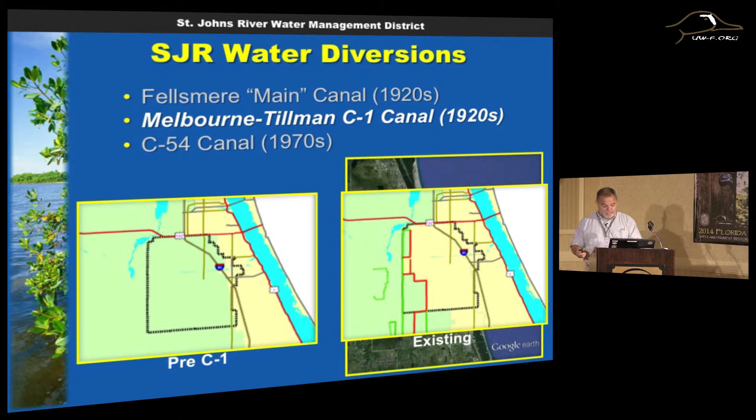If you look at, I don't know how well the green and yellow show up right here. You can see the area in green. The black box is the Melbourne-Tillman Water Control District. The area in green is part of their district that used to drain to the St. Johns River. If you look at the way it is now, all of this is turned yellow, all of this area, and this is a 100 square mile area. Almost all of that 100 square miles goes out to the Indian River Lagoon now instead of the St. Johns River. And that's what we're here to talk about, and that's what the rediversion effort's all about.

But what's wrong with that? What's the problem with putting the water? It certainly helps flood control. It gets the water out of there in those events. But what's in the water? First off, what's not in the water? There's no salt in the water, or very little salt, I should say. There's coloration, there's turbidity in the water, and maybe most importantly, there's a lot of nutrients in that water.

And what can that do? Well, you see the graph on the top, the salinity impacts. This is just one little slice of time after an event. And you can see how the salinity drops off. It plummets when these surges of fresh water move out into the lagoon.

Clarity drops. You look at the next picture, you can see the line real clearly where the clarity is. Some of that's tannin, but there's also suspended solids in there. There's a lot of things that are very bad for the water clarity, and they contain some of the material that ends up here, the muck.

We're about to spend $20 million, though the state is going to spend 10 this coming year on dredging at the Eau Gallie River. 625,000 cubic yards of muck will be dredged. I mean, it's an expensive thing to remove that muck. Those sediments that are in suspension cause those mucks, and the discoloration and the sediments that are in the water can lead to the seagrass loss.

Now, that's not what caused our seagrass loss that we had in 2011 and 12. The algal blooms did that. They shaded the light. But turbidity is another factor in that. Turbidity and algal blooms together, that's even more shading. When the light doesn't get to the seagrass, it dies.

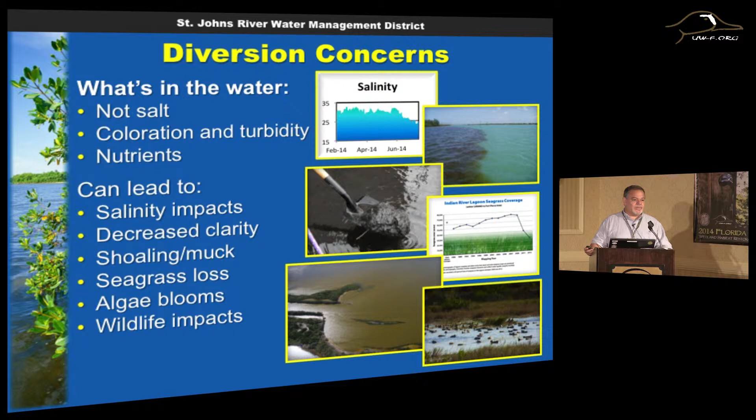You can see this is a picture of the brown tide, the algal bloom that happened for 2 years in a row. And all of this has a tremendous impact on wildlife. The ecosystem's in distress. There's no doubt about it. We're trying to figure out why, what we can do about it. And the bottom line is we want a healthy ecosystem that everyone can enjoy.

So what's the answer? The answer is really to try to put as much water as we can back where it came from, or back where it should go, I should say, back to the St. Johns River. But it's not easy. There are a lot of challenges.

There's flood control issues. There's a lot of population growth, a lot of density in the Palm Bay area. There's downstream growth along the St. Johns River. So all these people have to be considered. The last thing we want to do is impact them in a negative way in relationship to flooding.

There's base flows to the Indian River Lagoon. Yes, we want to cut down on the fresh water, but we can't take it out completely. It is an estuary. It depends on fresh water to keep the balance of salt and fresh appropriate. So it's absolutely essential that we keep some fresh water flowing through these natural tributaries like Turkey Creek.

The water quality in the St. Johns River. We can't just put the water in the river. We've got to treat it first. And I heard the word Sawgrass Lake. Hector came up in the comments. I'll talk a little bit about that in this presentation. Sawgrass Lake is a perfect example of a treatment area that does a really good job. As Hector also said, it's pretty new, so it's got a lot of nutrient uptake capacity right now.

But we've got to treat that water first, and economic. I mean, that's the one that hits us all. These things cost a lot of money. The C10 project that I'm going to talk about towards the end is probably going to cost between 12 and 15 million to build. And that's just the construction cost. All the other work that's been done is in the tens of millions.

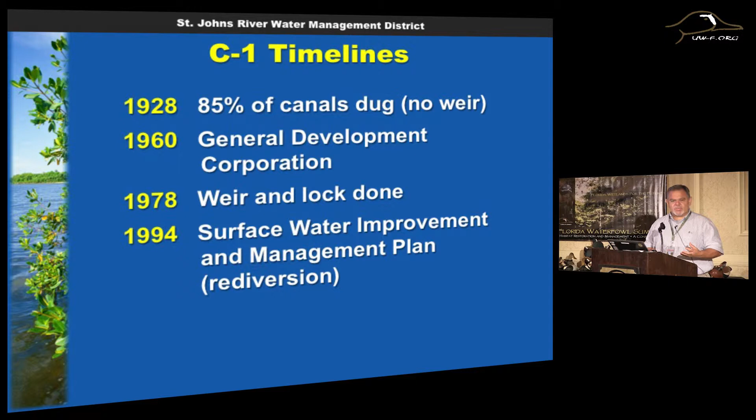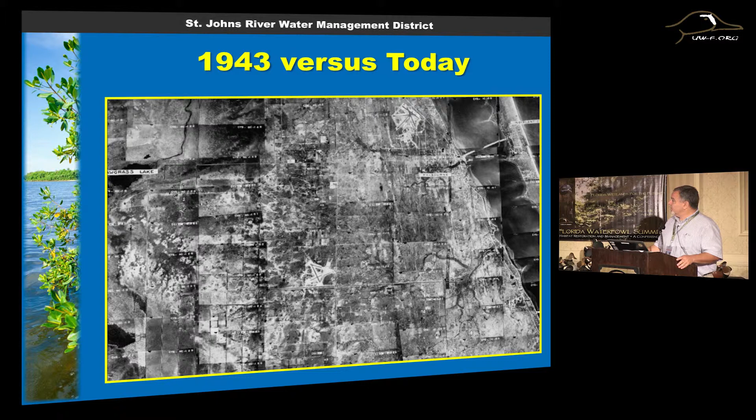The canals were dug in 1943, but not much was used other than agriculture. And you go look at what it looks like today, it's a little different. And that changes everything. Even though the canals were there, the way the water gets there is different. It's a lot flashier. That means impervious surface, it goes into the ditches and in the canals a lot more quickly. There's a lot more turbidity to that water.

There's a lot more nutrients, especially with fertilizers, with septic systems. A lot of these homes, I think most of them in certain areas, are on septic still. So there's a lot of things going into that water. It becomes even more important that we redivert that. So rediversion got some traction.

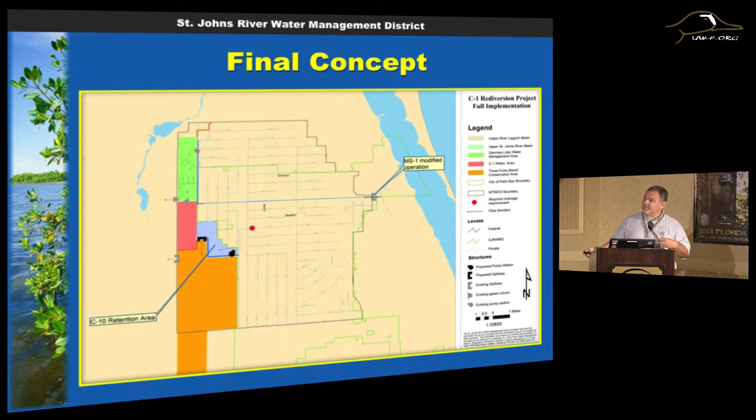It has all the components that we've come to know, the Sawgrass Lake water management area up here, C1 canal, the MS1 structure, which existed before but was modified, which I'll talk about in a minute. That's where we did the improvement, and this will be the C10 reservoir. So real quick, I'm going to do a brief discussion of phase one, which is complete. It consisted of several things.

The MS1 structure that was built in '78 was a different kind of structure. The gates opened at the bottom. They were called Amil gates, A-M-I-L. I don't even know exactly what that stands for, but the gates opened at the bottom, so the sediments that were at the bottom flushed right out into the lagoon every time the gates were open. We had to put in pump stations out west to get the water into Sawgrass Lake.

The river's higher out there, so we can't gravity discharge in and still provide flood protection. We have to get it up high enough so that it can gravity in. We had to make an outfall structure out of that Sawgrass Lake water management area. We had to do that Hurley Road improvement, as we mentioned. And lastly, the MS1 operation had to change, and I'll talk about that a little later.

The benefit of this project was that 28% rediversion. What that means is 28% of the average annual rainfall now goes back to the St. Johns River instead of out to the Indian River Lagoon. It's by no means what we want. We'd like to have a lot more than that, but it's the first step. It's the first phase, and out of it, more than a quarter of the water. And this year, we got even more than that because it was such a wet year. They've been pumping nonstop all summer.

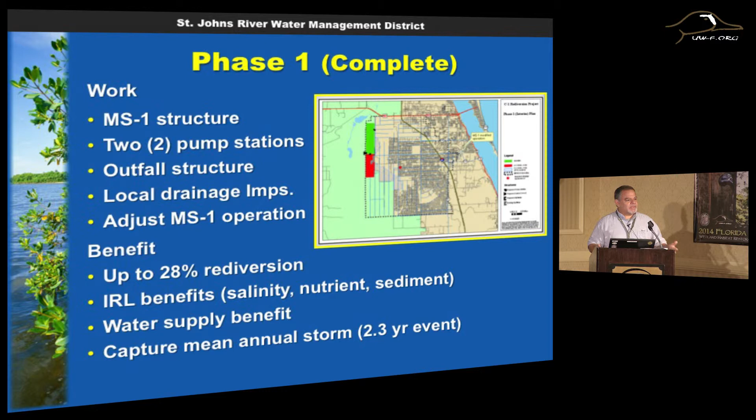It totally holds that back minus whatever's flowing over the gate. That's a huge improvement over the past. I'm going to fly through these pretty quick because I know I'm short on time.

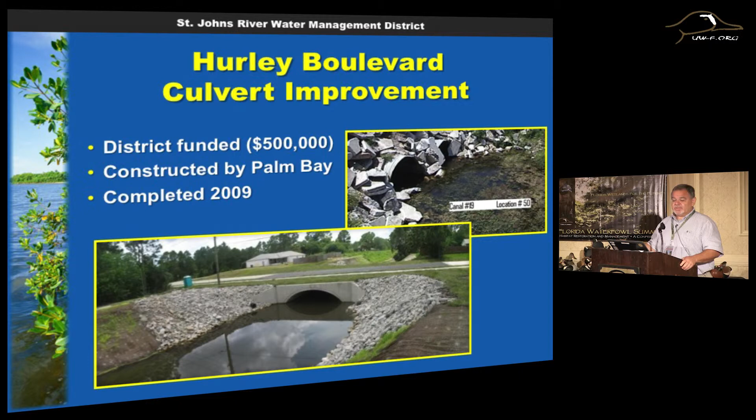The Hurley Boulevard was a pretty simple improvement. The culverts were replaced to improve the flow. The district funded it, but Palm Bay constructed it. That's now done. The Sawgrass Lake Water Management Area, Pump Station 1. You can see where it's located on the inset. It's on the west end of the C1 canal.

It's designed to bring the water into Sawgrass Lake and have it treated in the southern cell of Sawgrass Lake. That's operational now. It's been running pretty much nonstop all summer, except for a brief time when we had a problem with one pump, which is now fixed.

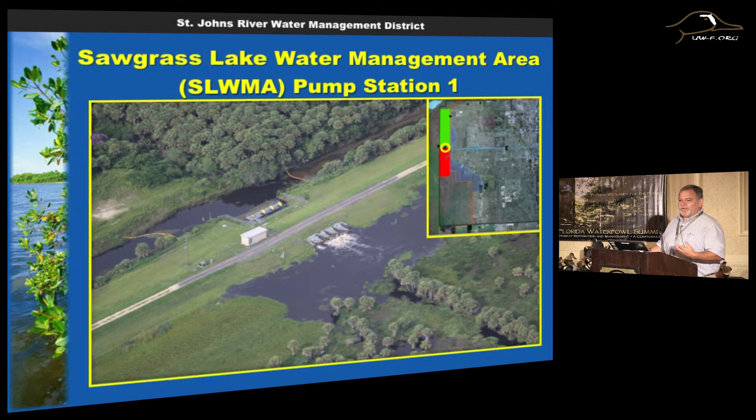The North Pump Station up in the north end of Sawgrass Lake pumps from the C2 canal in, and you can really see how turbid the water can be at times that's coming in. It's kind of got that brown color, and since it's just come in, it hasn't been treated yet.

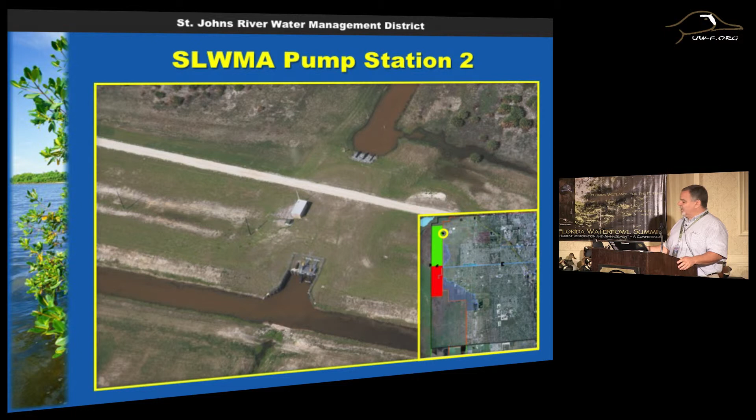But as you go towards the outfall, which is down on the southwest corner, the water quality, I was out there about a month and a half ago, and the water was so clear coming out that outflow structure. It's amazing. By the time it gets there, it just loses almost all of its turbidity. In fact, I didn't notice any turbidity visually. Nutrients are reduced, and some of that's because it's new, and the growth has been phenomenal in the last couple of years. But it's an amazing system.

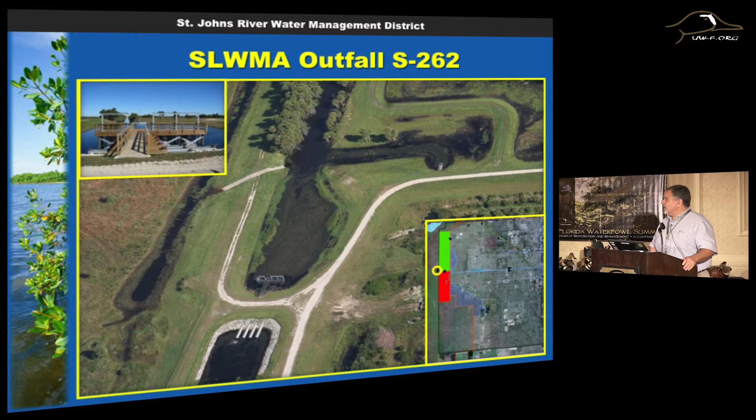So what's next? The C10 reservoir. This phase 1 is working well. There's been a few bugs in it. Melbourne-Tillman Water Control District had some concerns that we're working with them on. They've had some impacts due to the higher water levels, and I'll talk about those levels in a second. But what's next? The C10, I think I skipped that one. Let me back up here.

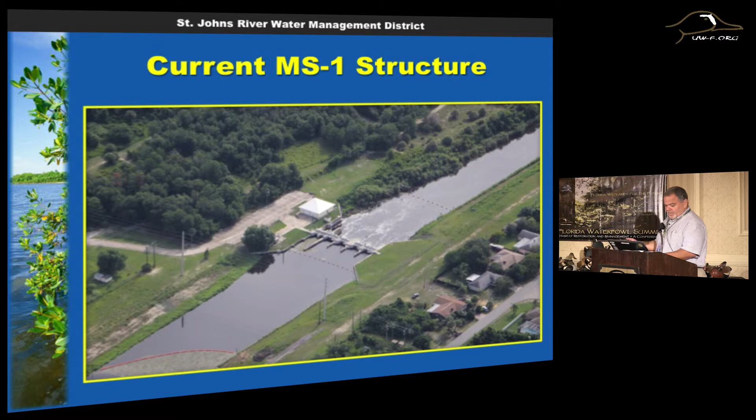The MS1 structure, I wanted to talk about that briefly. This is what it looks like now. It looked very different before. And I mentioned the operation schedule issue. You can see in the past it was at elevation 4 all summer, so whatever came went out to tide. Elevation 8, they'd raise it up during the winter. And then the new operation has it at elevation 10 all year.

And the minimum flow is what's important. It doesn't just hold the water at 10, but as we hit a dry period, the water levels start to go down in the canal. The gates gradually open to keep 25 cubic feet per second flowing out into the lagoon to address those minimum flows. We have to keep the water level that high so that we can pump on the west end. It's that simple. The higher we can keep it, the more we can pump.

So it's this delicate balance of keeping the water levels up, pumping into the St. Johns River, and not causing flooding. So that's the tricky thing that we're working out with Melbourne-Tillman Water Control District right now. And we've developed a pretty good partnership with them. All summer, until just recently, they're opening it for some maintenance, but all summer they've been at elevation 10, actually closer to 11. We've been pumping like crazy.

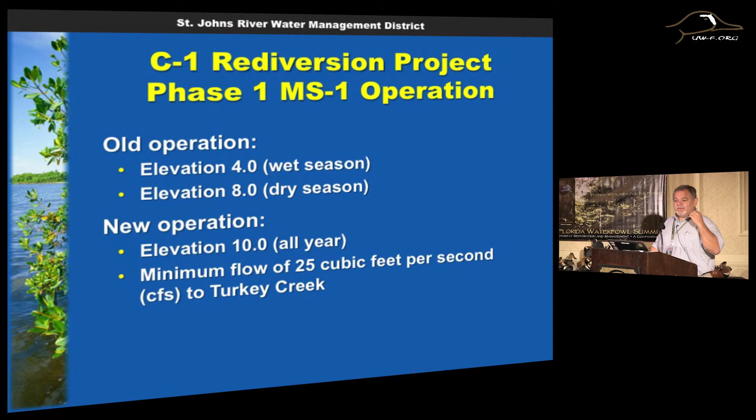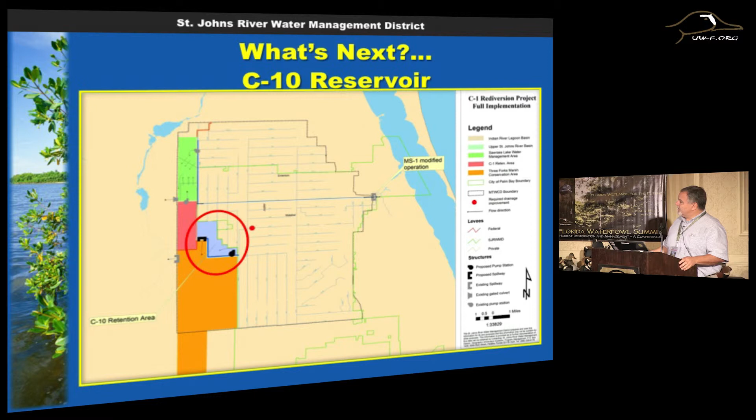So the C10 reservoir, you can see this is the next step. I circled it in red here. All the other components are built. This is the last component that has to be built. And I like to think of this in a way as a mini Fellsmere, because it's very much like the Fellsmere water management area, except on a smaller scale. Fellsmere is 10,000 acres. This is 1,300 acres. But the topography is very similar.

Up here you've got elevations 20 to 21, and down here you've got elevations around 14 to 15. So when this is flooded, it's going to have a very similar ecosystem. It will have a lot of open water. It will have some emergent and transitional wetlands. And depending on the final stages that are selected, it may even have a little bit of upland in the top corner. So from a wildlife standpoint, it should provide the same kind of benefits on a smaller scale that Fellsmere provides.

It's going to consist, at least the current plan, it's in the conceptual stage, right? Actually, conceptual stage is done. It's in design. This is a levee construction similar to the Fellsmere levees. This is the federal flood protection levee that will have to be benched for erosion control. We'll pump water in from the Melbourne-Tillman's C9R canal, and it'll probably come out either here or here into the Three Forks Marsh Conservation Area.

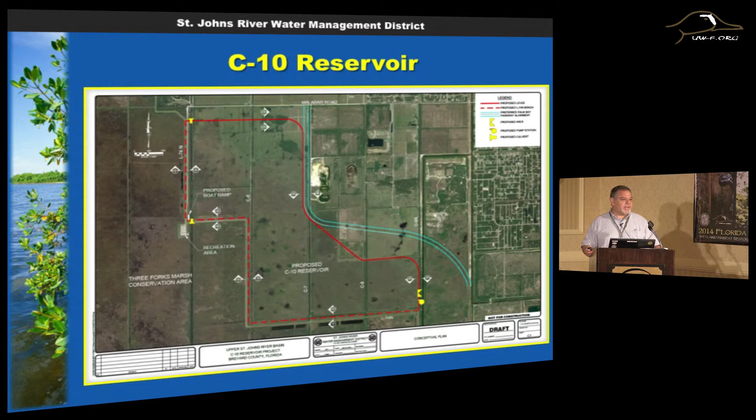I don't think this is going to happen up here, but that's not certain. That was just an outfall for potential flows up north, but the modeling will determine whether that piece is necessary or not. So as I said, it's a 1,300 acre reservoir. This gets us a lot higher. This gets us from the 28% I mentioned a minute ago up to close to 43% of the mean annual rainfall put back in the St. Johns River. We're getting very close to our goal of 50%.

And something we're trying to do here is, I talked about those pump stations a minute ago. They were each designed with an empty pipe going through the levee. So we're also adding 2 additional pumps out there to increase the pump capacity by 100 cubic feet per second. So we're going to be pumping, hopefully exceeding the 43 once everything's operational.

The sediment nutrient removals will be incredible for the Indian River Lagoon. They're going to help tremendously. And this gives us even more water supply benefits. It also gives us a reservoir we can hopefully draw down from to keep minimum flows going in drier times.

And recreational opportunities. Hector mentioned the walk-in use and the non-motorized. I think we're going to be looking at something very similar for this project, with no motorized boats, no airboats, but walk-in recreation. Potentially, it will be almost exactly the way Sawgrass Lake is managed right now. So I think that provides benefit for everyone.

I mentioned the levees, 4 miles of levees, a lot less than Fellsmere, but it's still a fair amount of levees. It's going to have a big pump station coming in. We're not sure of the size yet, but it may be as much as 300 cubic feet per second. That will be located on that south end. It will have an outfall structure, as I mentioned, and we're still working on what kind of internal improvements are necessary.

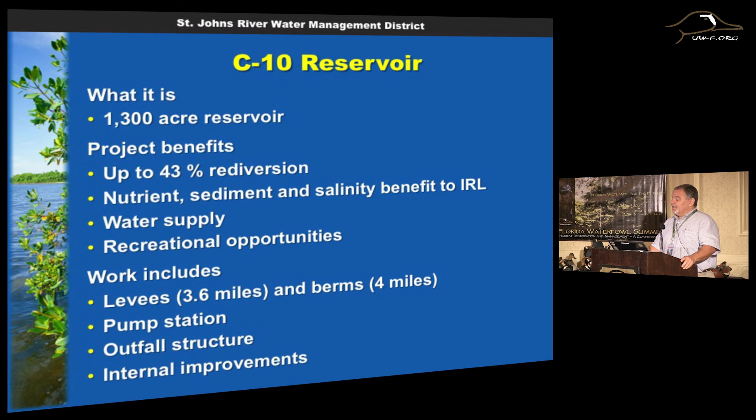As I mentioned, design is underway. It's going on this year. We're hoping to have design far enough along sometime in early spring to move into the permitting phase, to get our permits submitted to the Army Corps of Engineers, and construction beginning in fall of 2015. It looks like it's about a 2-year construction project.

That's probably optimistic. It may be a little longer because you always have things come up. We found that out in Fellsmere. We thought we were going to be done a little earlier, and reality set in, and we're back to our original schedule. So we're going to try for 2 years, but if it's 3, don't, you know.

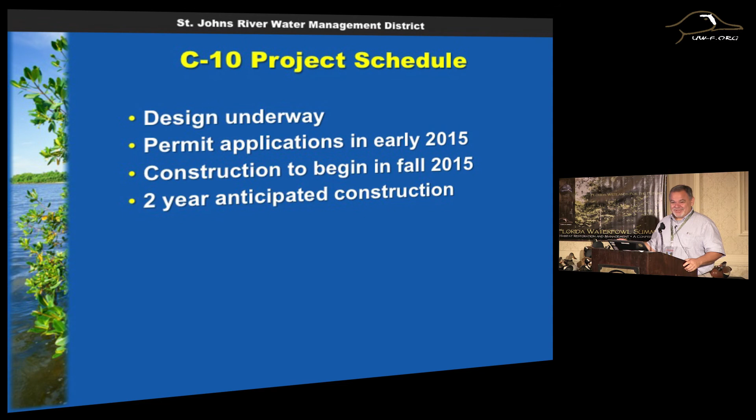With that, I just want to ask all of you for your support in our efforts, not just in the Indian River Lagoon, the Upper Basin, all of our restoration efforts. We're all hopefully on the same page here, moving towards the same thing, wanting to have a vibrant, healthy ecosystem so that we and our children can enjoy it long into the future.

We know that population is going to continue to grow over the coming generations, and if we can put some things in place that guarantee a lifestyle for the future so that we all can enjoy it, I think that's critical, because we've got to somehow keep what we have here and not let it degrade. And with that, I'd be happy to answer any questions about this, about the Indian River Lagoon Protection Initiative, or anything else you'd like to ask.